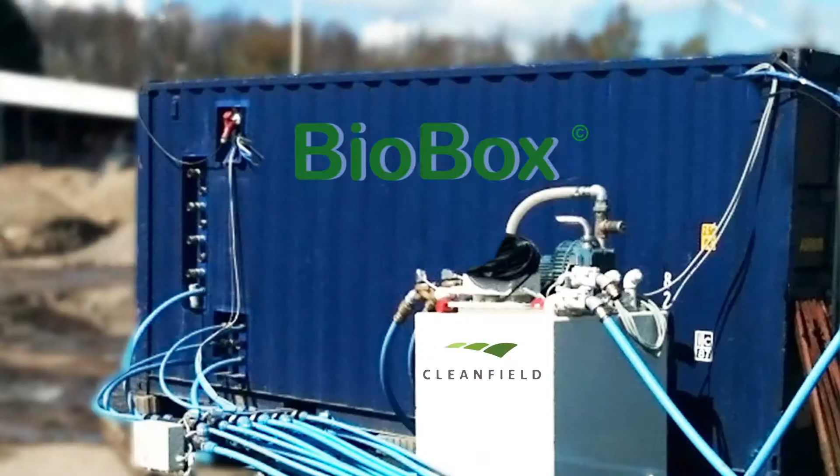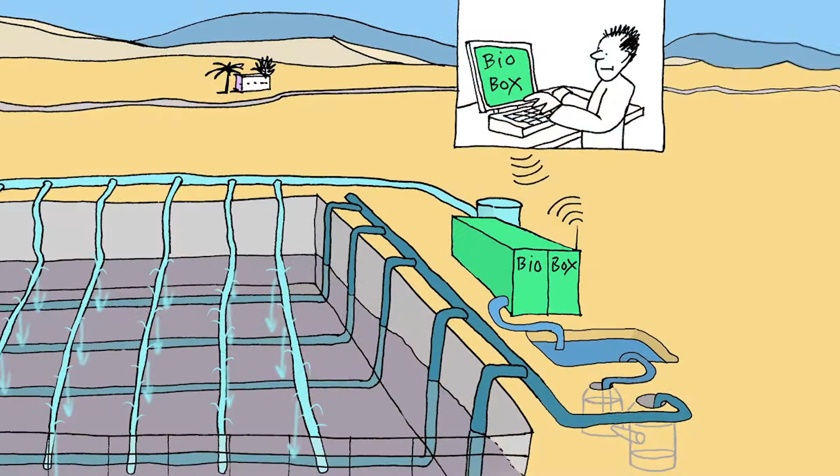Cleanfield has successfully operated in bioremediation of hydrocarbons for many years. We have been operating in a number of countries in Europe, and we have, based on that, now invented a BioBox, which is a patented system that can automatically and via computers degrade almost any hydrocarbons to almost any level all over the world, sitting here in our office in Denmark, supervising, controlling, gathering information, and doing a lot of research and reporting at the same time.

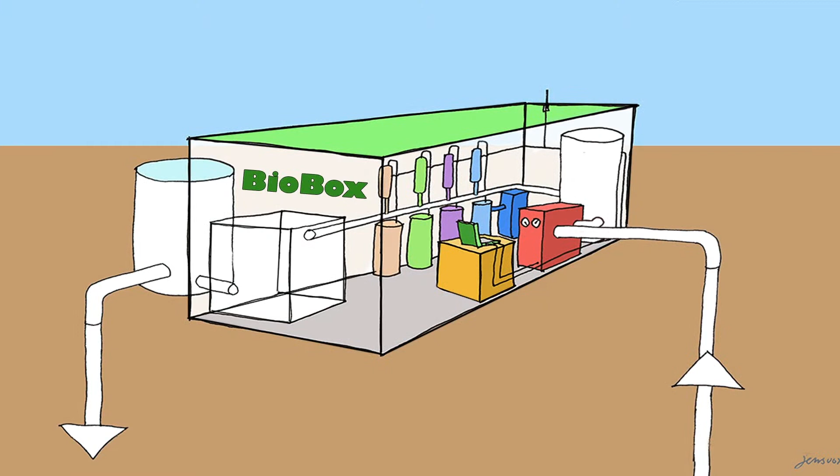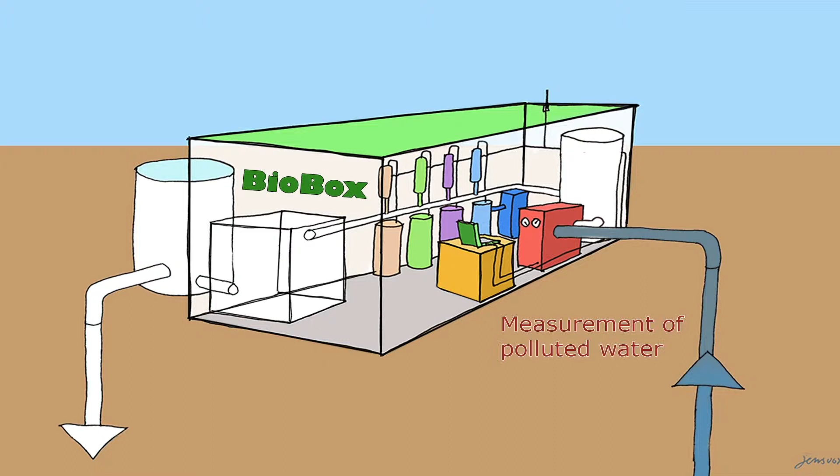When the BioBox needs water for mixing the cocktail, water is pumped from the groundwater or from the pond next to the BioBox. The water is analyzed, and if the quality is good enough, it is pushed forward in the process. If not, unwanted components are removed.

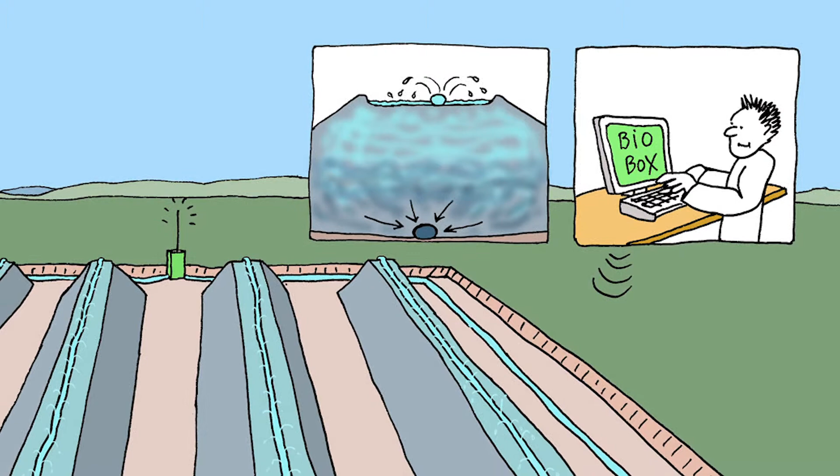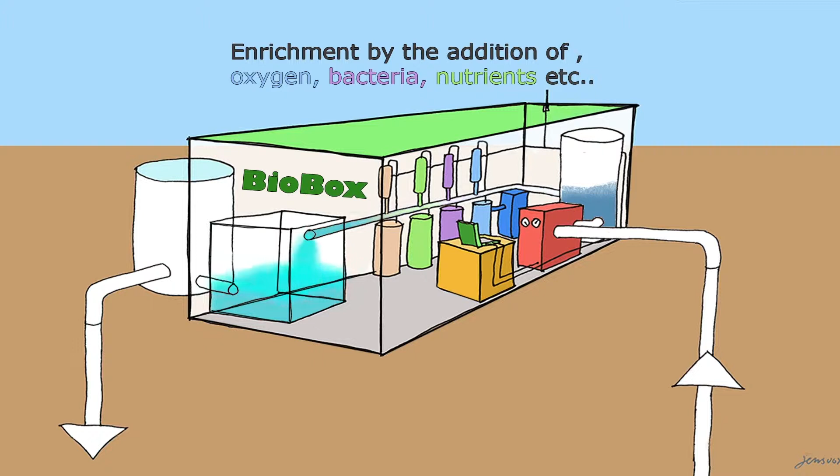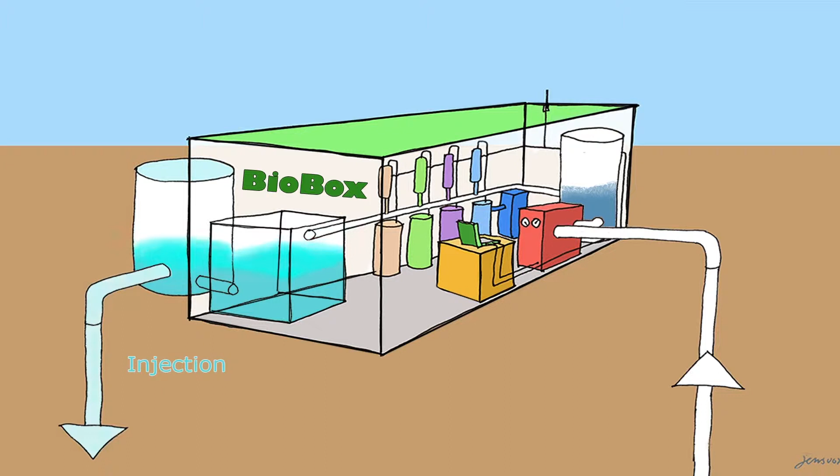Sensors from the biopiles are telling the system what they need, and depending on those data, the water will be enriched with oxygen, with bacteria, nutrients, or any other components before it reaches the holding tank for next injection. Depending on what we need from the piles, we are mixing the biococktail from a long range of recipes. Water is queued up in different tanks for injections.

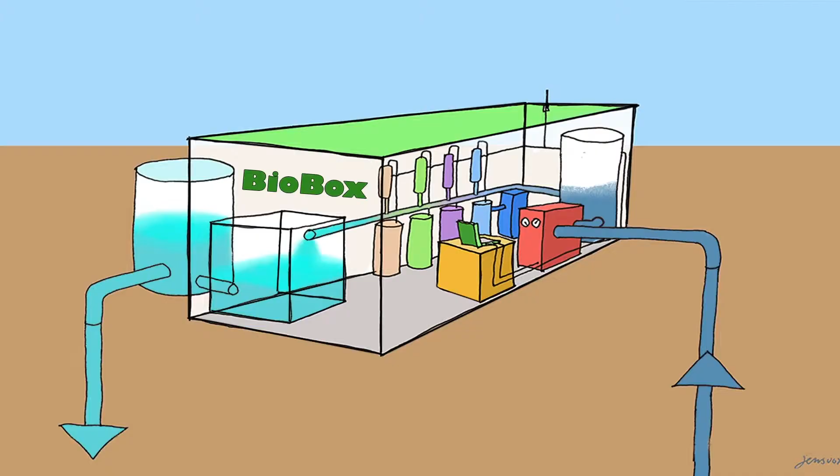When the BioBox has been installed, we have access to the PLC, the computer, and by that we can have an overview of the whole system. All data will be accessible and transferred using the internet to our central office, where engineers can supervise and control any process in any system anywhere in the world.

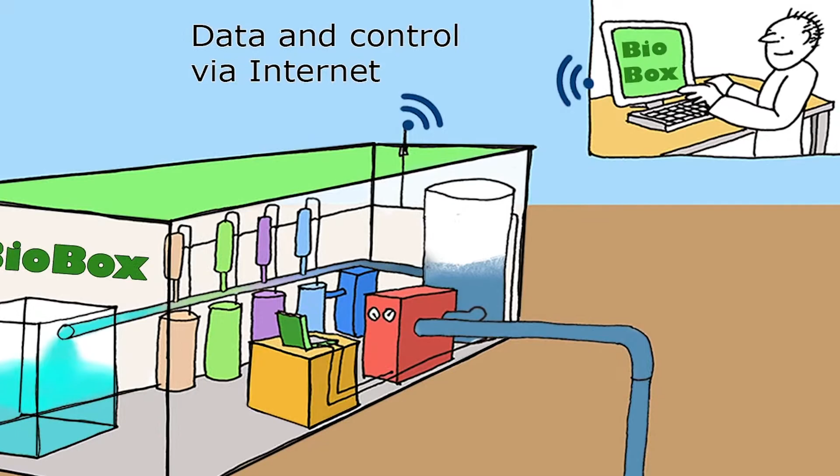It is very important that the BioBox is based on reuse of all resources in the system. That means we are reusing the water, the nutrients, the bacteria, and the BioBox itself. So after installation and completing a job, we can, with very easy tools, move the box to a new place and install it, and it will function within a few days.

We can remediate a large amount of soil. That means from 300,000 to 500,000 tons at one time. We can decrease the time of remediation by more than 50% compared to traditional systems.

The system is fully automated, so whenever data is coming in, the computer knows exactly what recipes have to be mixed and injected. Under permanent 24/7 process control, sensors built in all over the system are telling the computer the exact condition of the degradation, so we know exactly what is going on and we can take action immediately. Safety plans, that means alerts, alarms, supervision, malfunction, and so on, are all built into the system.

All activities in the system are documented automatically. The supervisor can send reports to the client or to the technical staff, so they know exactly what to do next.

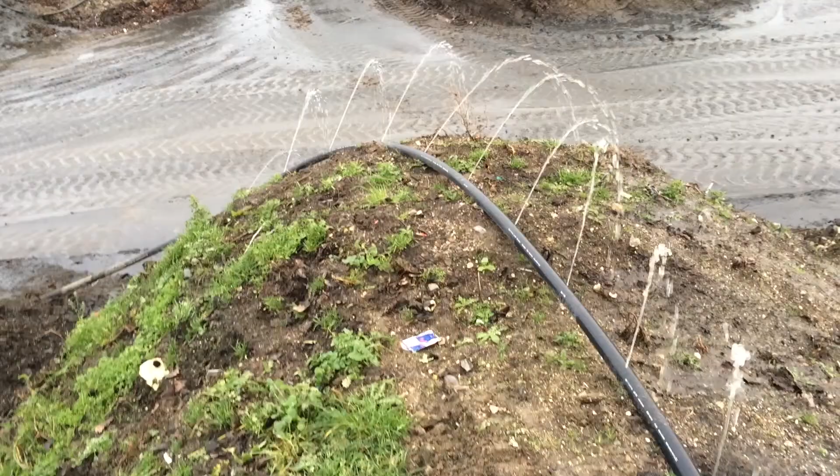I have a slogan for you in the end. Restoring nature's order.